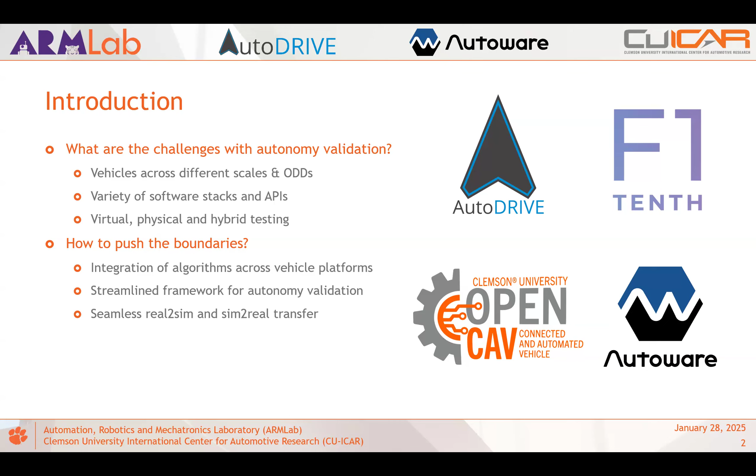There are a variety of software stacks and APIs out there, and we can have an option of testing purely virtually, purely physically, or in a hybrid setting. These kinds of challenges were the main address point of the paper, and how we can push the boundaries to now use AutoDrive with the AutoWare stack was the main focus.

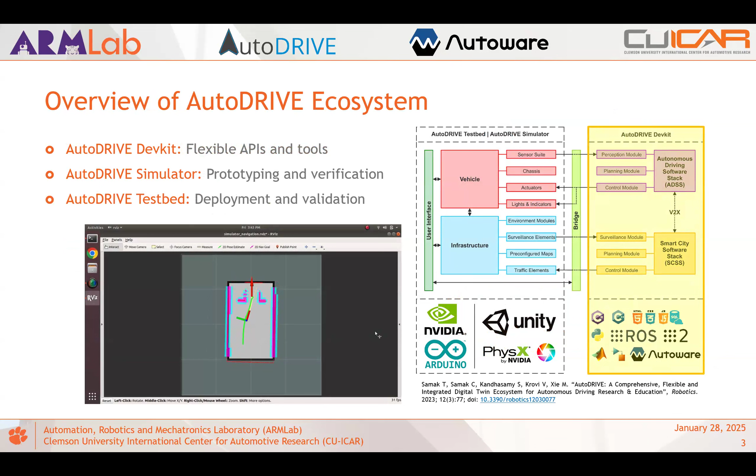For those who might not be aware of AutoDrive, it is an ecosystem we are developing, wherein we have three distinct components. First is the dev kit, which has a flexible set of APIs and tools for developing autonomous driving algorithms, and this is where we are now interfacing it with the AutoWare stack.

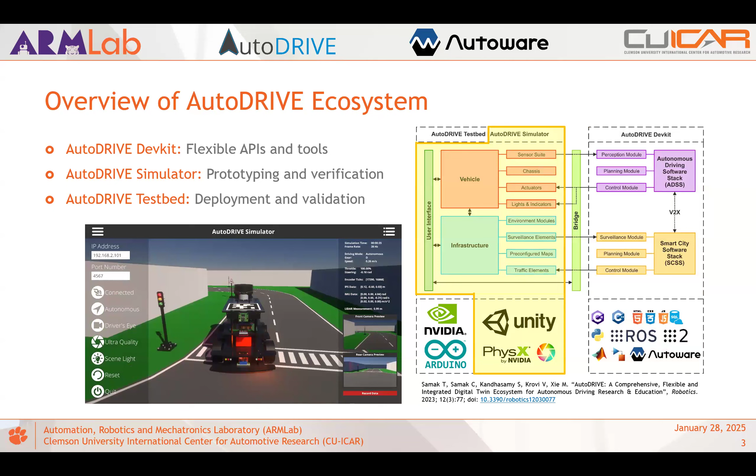Next is the simulator, wherein we can do virtual prototyping and verification across parameter sweeps and potentially even in the cloud, as we'll see. And finally the test bed, where we can do the physical deployments.

Now these are all examples with a single vehicle to show the examples, but as we will see, we were successful in deploying this across different scales and ODDs.

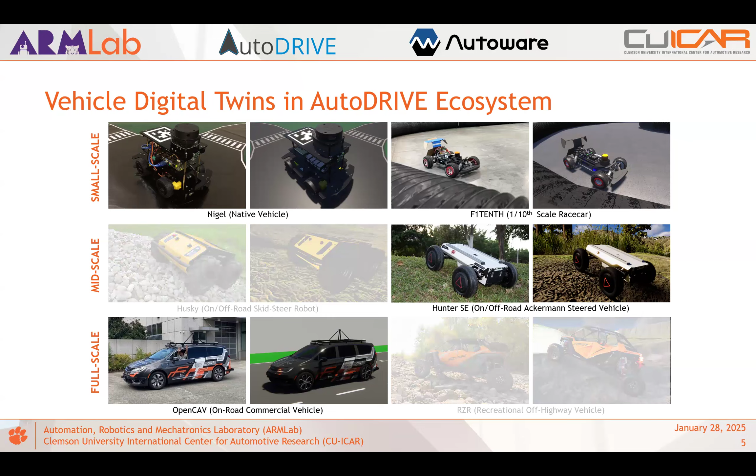So these are some of the vehicles that we have. The rows indicate different scales, and in terms of the columns, the first and third columns are the real or physical twins, and the second and fourth columns represent the digital twins of the same vehicle. These are the four vehicles we will be particularly considering in the further slides.

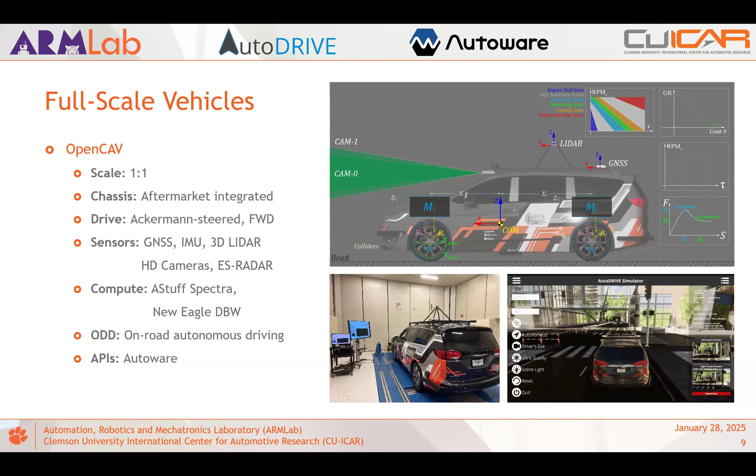This is one of the vehicles called Nigel, which we started off the AutoDrive ecosystem with. We were able to successfully expand it to other vehicles like the F1TENTH, as most of you would be familiar with. In the mid scale we have the Hunter SE, an Ackermann steered platform by AgileX. Finally, in the full scale, we tested and deployed things with the OpenCAV, an aftermarket integrated autonomous vehicle that we have at our facility.

So across all of these vehicles, the common deployment was using the AutoDrive simulator or the testbed, or whatever component of that, along with the AutoWare stack.

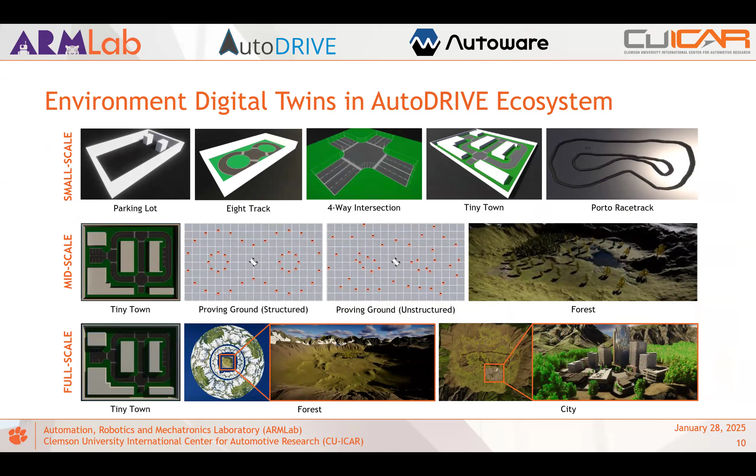We tested across different environments. I will not belabor the discussion here, but each of these environments targeted either a distinct ODD or different features in terms of the environment representation. And as we will see in the deployments phase...

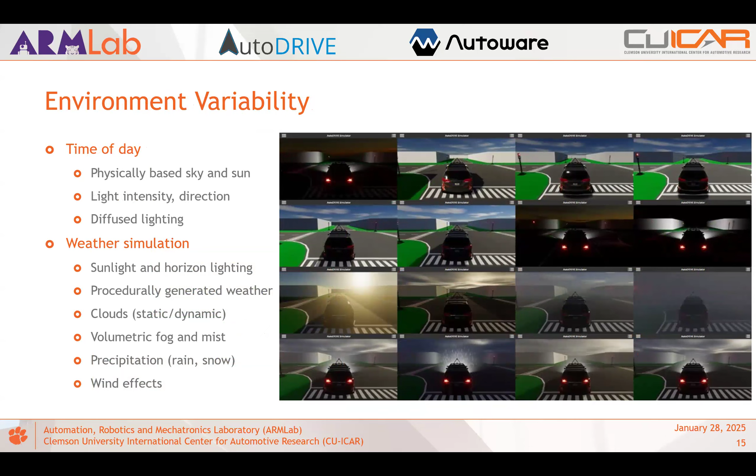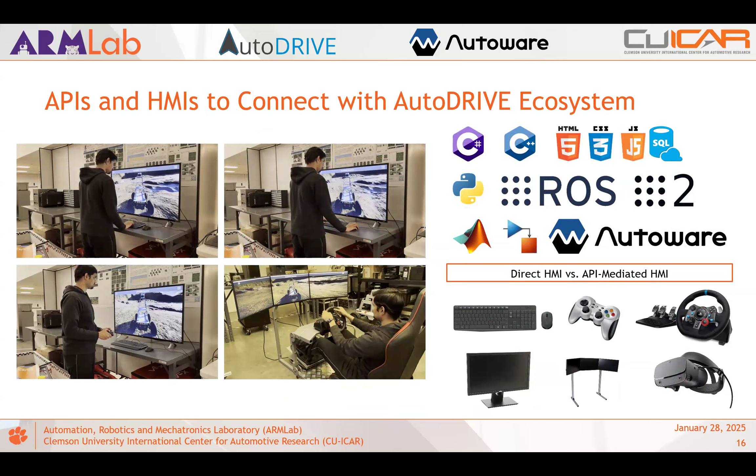We were able to even control the environment variability, in terms of the times of day or the weather conditions we are working with. While we have a whole host of APIs and HMIs that we can work with, the primary target for this work was Autoware. In one of the future slides, we will also see the different HMIs potentially in action.

This is the deployment with Nigel, where the core focus was to demonstrate an autonomous parking application with sim-to-real transfer. In terms of the sim-to-real transfer, it's worth mentioning that we did not change any perception parameters or controller gains, and we were able to do a zero-shot transfer from simulation to reality using this framework.

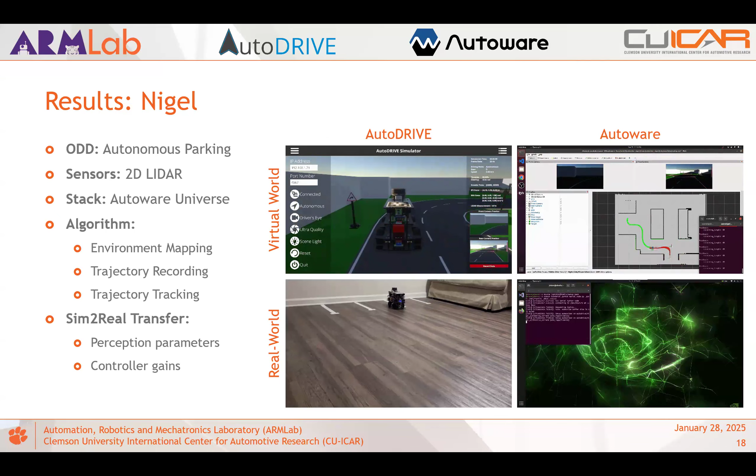The same applies to F1TENTH. The only difference here is the operational design domain, wherein we are now targeting a little bit more towards the racing application instead of just parking. And again, we were able to do sim-to-real transfer without changing any perception parameters or the controller gains in this case as well.

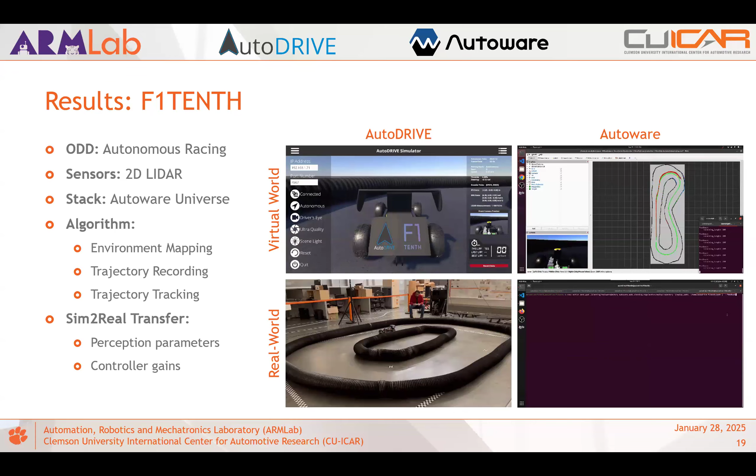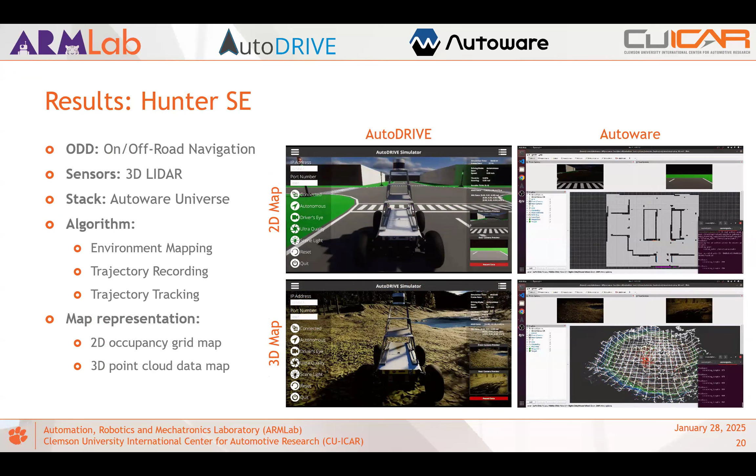Coming to the mid scale, here we experimented with on-road as well as off-road navigation. The top row indicates, again, a similar parking application wherein we have a simplistic environment representation. And in the bottom, we can see a deployment in the off-road area wherein we are using a point cloud map now for localization and point-to-point navigation from a designated source location to the designated destination.

And finally, we also did a similar case study with the full-scale vehicles. This was targeted towards the on-road domain. Again, the application remains autonomous parking, but here we experimented with 2D and 3D representations to see how it affects the environment representation. In the first row, you can see a simplistic environment representation wherein 2D maps or surrogate maps could be sufficient for navigation. But in case of higher fidelity environment representations, which is what we would most likely encounter in real world scenarios, 3D point cloud becomes a necessity or a benefit.

So these were some of the highlights from this presentation.

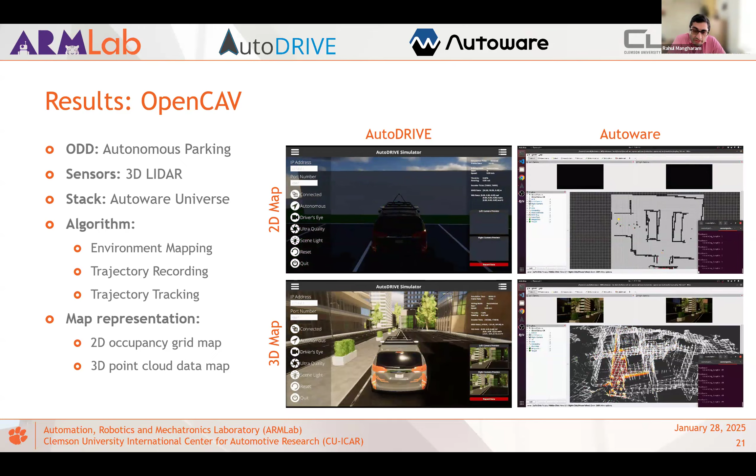Tanmay, on the right hand side, are you showing the real thing, or is it still in simulation, the point cloud? Could you repeat that? You mean like at the right bottom, you're showing the map, right? Yes, that's just in sim, no? So it's the map of the scene that you see on the left in the simulation. Oh, in the simulation, okay. Yeah.

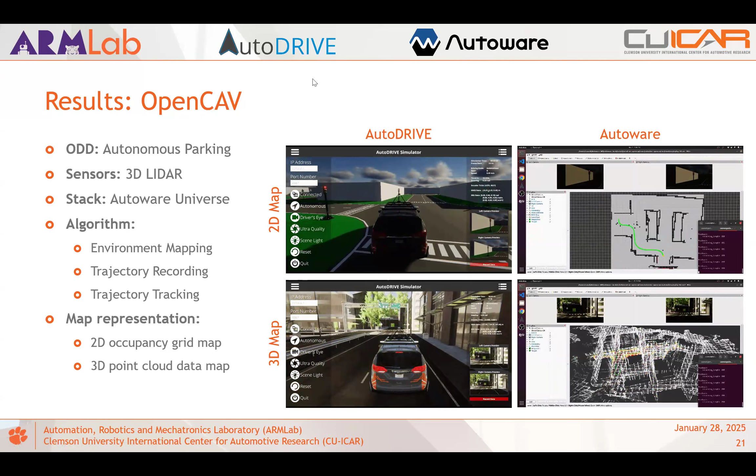And then apart from this, if we have a couple of minutes, I'll just ask Tanmay to give a glimpse of the sim racing league that we were able to deploy at IROS and CDC in the past few months.

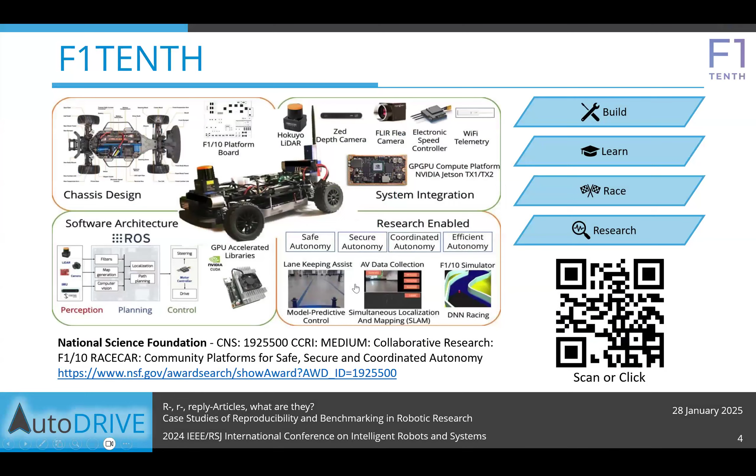We can't hear you. Chinmay, Tanmay, are you all speaking? Because we cannot hear you all. Yes, Dr. Mangharam, we were speaking. I think Tanmay's mic might not be working. I can just ask him to use this. Okay.

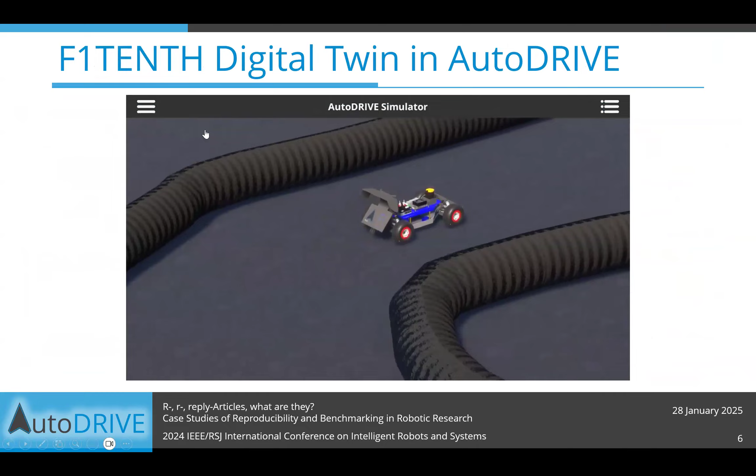Let me just back up a few slides. Sorry about that. So yeah, the idea was to use the F1TENTH digital twin that you saw in earlier slides.

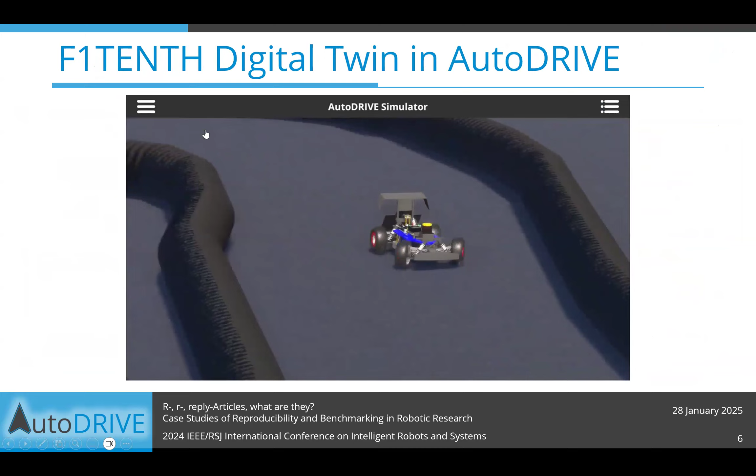To have a simulation-based competition for the F1TENTH, where teams from all across the globe could now have the F1TENTH competition accessible. And more importantly, this could be a good way of tying in reproducibility and benchmarking within the competition setting. And then, of course, these can also be expanded further for full scale or off-road applications.

We also have plans to now put this in the cloud, hopefully for the ICRA competition this year itself. But if not, at least by the end of this year, we definitely wish to have a cloud setting where instead of just local resources, we can also have a common cloud platform, and the AWS credits can hopefully go there and put to some good use. So that's definitely in the plans.

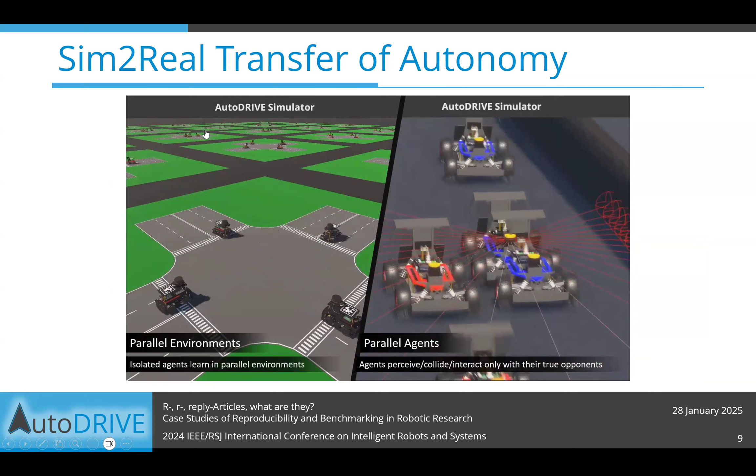And then, of course, the idea is always to be able to transfer policies trained in simulation to reality. We had a team at IROS where they could successfully do this, and they participated both in the sim racing league as well as in the physical racing league, and had a zero-shot sim-to-real transfer.

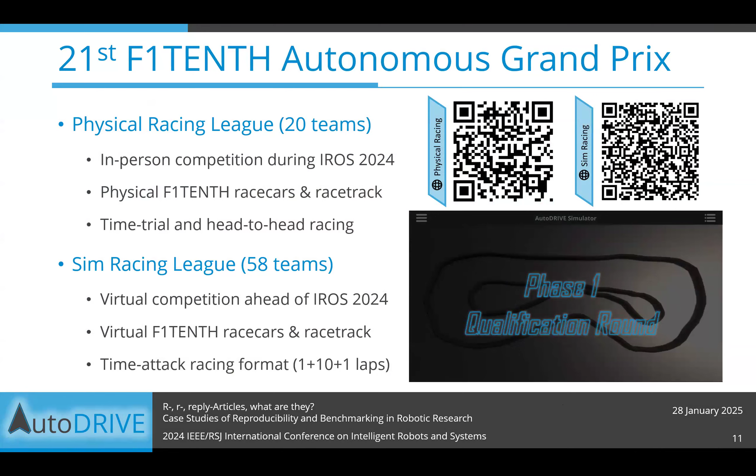So here is just a quick overview of the competition. I won't go into the details, and the video that you see here also talks a little bit about the competition summary. I think Chinmay has just posted a link to that in the chat, so I won't belabor that.

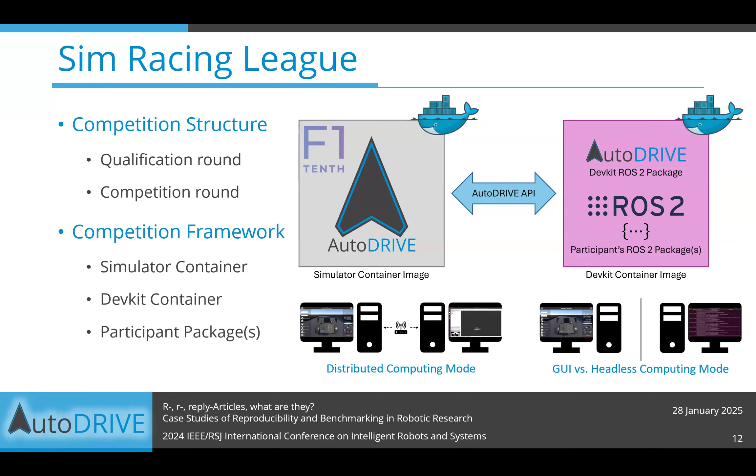And this now enables reproducibility and benchmarking, as I said, bringing AutoDRIVE and F1TENTH together to now unlock the full potential of autonomy in terms of both physical and simulation-based competitions and research.

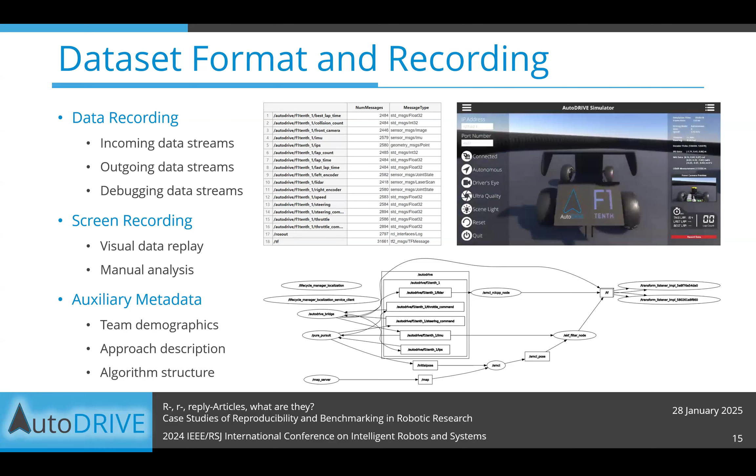And then these were some of the metrics that we used to mark or benchmark the performance of different teams and have a detailed analysis of and impose race standards across different teams that we have.

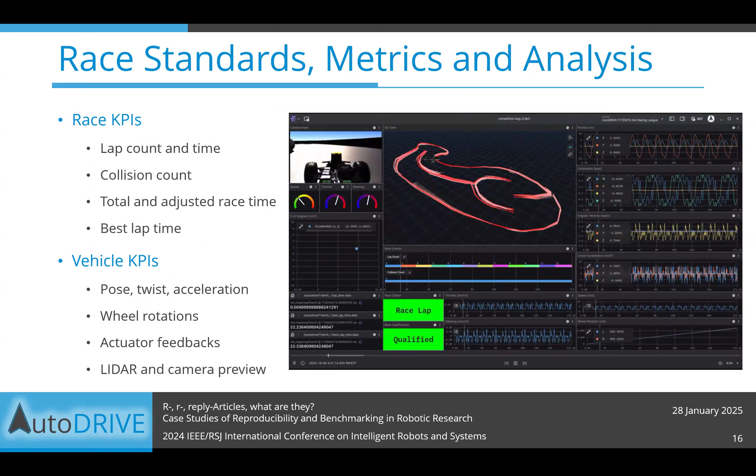And the idea was to now also expand this, and especially when I talk about CDC, we also had a few teams that are now requesting or already on their way to deploy things with Autoware.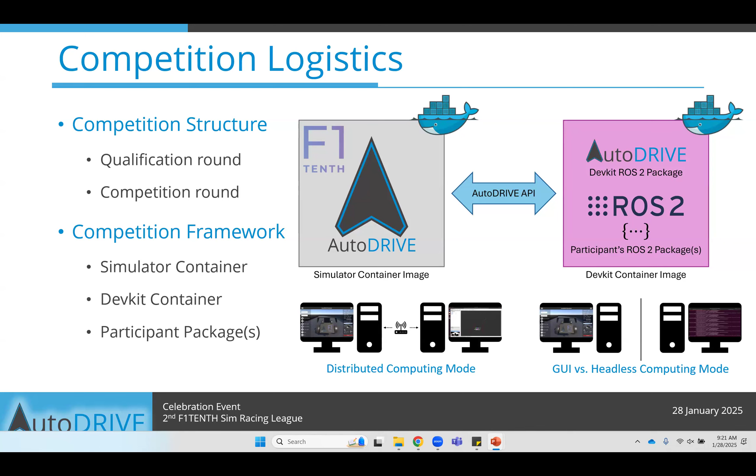But another important thing here is that we have now ported the framework to support ROS Humble, and we are hoping to shift the entire Autoware Autodrive integration framework towards Humble and the latest release of Autoware, so that users can leverage the latest and greatest features of Autoware with Autodrive.

So I think we went a little bit over time, I'm sorry about that. But if there are any questions, we can hope to answer them, or if there is no time, we can move on to the next presenters.

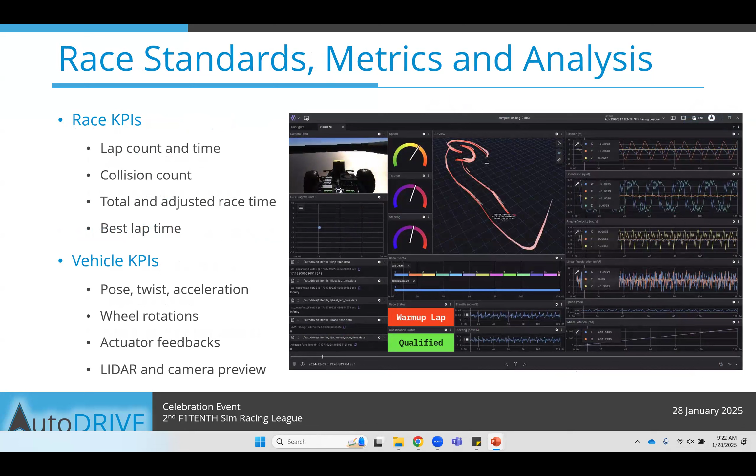Thank you so much, Tanmay. This was a very good update, and I think our follow-on with Pooja and Mike is to figure out now how to integrate this within the Autoware universe and make it one of the publicly available digital twin sim-to-real environments that folks can use. I think hosting it on AWS is definitely the right direction for the next competitions.

Yeah, thank you. Any other questions folks have? Yeah, hey Raul, just a quick question. Great work, guys, really nice. So in terms of using it from an Autoware perspective, and I know you guys also have a Pixkit, but I'd be interested, and Alex is on the call too for Carballo, who also has a Pixkit, some physical hardware.

Do you have any thoughts on this? I mean, I'm interested in exploring the validation, verification, putting it on an actual vehicle here that we have available, and I know you guys have one too. Are there any thoughts on that? Like, what would it take to do something like this on the Pixkit, as an example?

Yes, so in the presentation you might have seen our deployments currently at small scale, including Nigel as well as the F1TENTH vehicles that we have. But we are currently working with the Pixkit. We are also in the process of system identification and bringing the Pixkit into the Autodrive Simulator so that we can work with its digital twin and then do zero-shot transfer, hopefully even at that scale. And as further scaling, we are also currently working with OpenCAV to do the same.

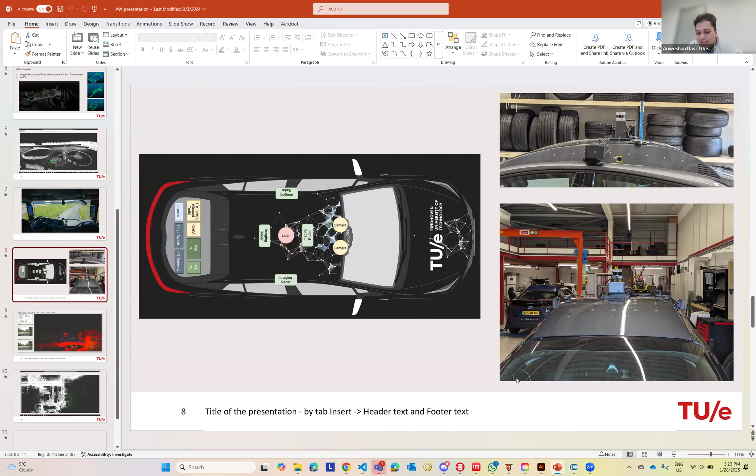That's the main update. If you want to see some results, let's say the point cloud that we generated from the map, generated from only the radars, is this.

And what kind of radars are you using? So these are Continental 5th generation. To be exact, it's 548 RDI. So this is a high definition radar. It has 12 transmitting antennas and 16 receiving antennas.

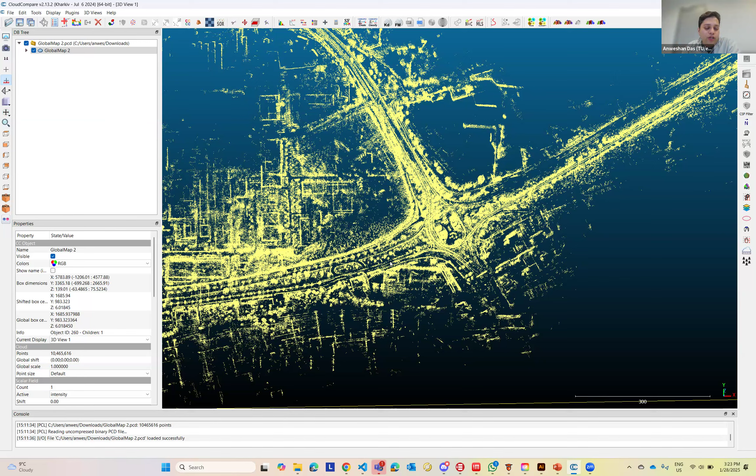But these are not the greatest high resolution, high definition radars, which might have 48 transmitters and 48 receivers. For each scan, it can generate up to 800 points, each one of the radars.

And what's the benefit of having a radar-based system versus a LiDAR-based system? The main advantage is that we want to show it works in really difficult weather scenarios, let's say fog or snow, where radar signals are immune to those. We have really seen, when we were recording data in foggy areas, since we were only using LiDAR-based or point cloud-based localization, it really struggles.

We want to say this is a much more redundant system, which is adaptable to other weather conditions, adverse weather conditions. And what kind of localization algorithm are you using?

For our RioSAM, we use GICP, fast GICP to be exact. But we have also tested this combined radar point cloud on a LiDAR-based point cloud map, where we tested with NDT, and there also it works.

Okay, very interesting. Yeah, we are also really happy to see that it works on the maps generated from LiDAR point clouds. It was also quite exciting for us. And we also want to publish those results in IROS.

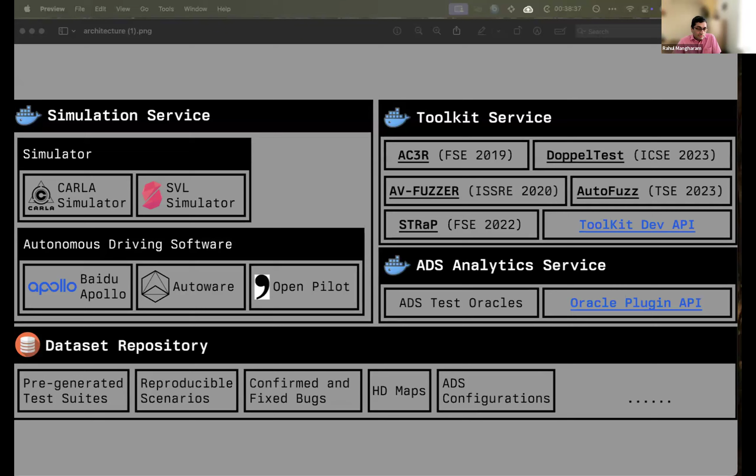Just one quick one, Josh. If the application that you're scanning and monitoring - if one wanted to go beyond Autoware and add, say, a speech recognition module for interaction with the robot, expanding the scope of the Autoware ecosystem - could that also be tracked with your monitoring, getting input on errors and so on from that side of the equation? Would that be easy to add as an additional app?

That's one of the goals we want to support. So for instance, if you want to add something like that, we want to provide essentially the test harness, the CI/CD infrastructure, so you can regression test that more easily, and maybe even fix some of the bugs automatically.

Yeah, okay. And then that's awesome.

Have you looked at whether this dovetails with certain requirements in ISO 26262 or other documentation, like hard-coded certification quality parts? Whether this facilitates that? So, ISO 26262, road vehicle functional safety, that kind of stuff, in general, because there's so many moving parts to that, depending on where you are, et cetera. But with regards to actual certifications, regional certifications, regulations, part of it does go into ISO in general, how well your process is documented, process ownership, changes, all that sort of stuff. And it occurs to me that this facilitates that somehow.

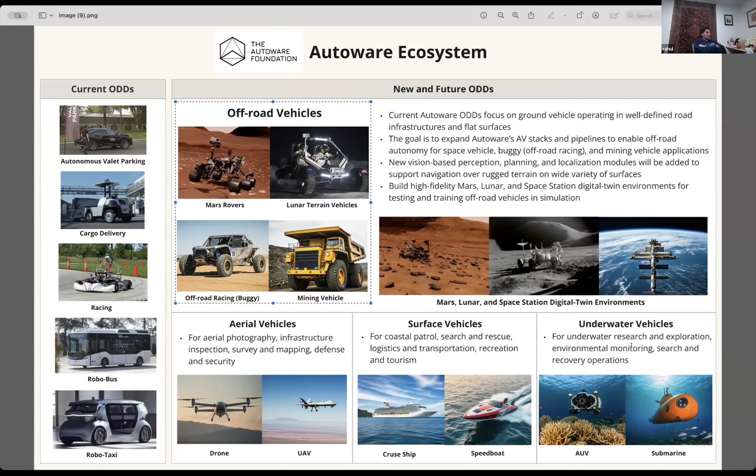Think about this in a theoretical context, which is where academics should have more value: how do you build a simulation environment where you segregate the physics of the environment, whether ground, water, or space, and the design for experiment, and these things that are the cornerstones of a virtual environment. How do you segregate them from an abstract point of view so you can get some level of plug and play?

That's the key thinking process, because once you can do that, you can say, okay, we can integrate AirSim over here while still using the random number generator for scenarios. There's a lot of intermediate mathematics that, if thought through well, can be quite interesting.

Yeah, thank you so much.

Hormoz, to complement what you were talking about regarding directions in dynamics and controls, I think this will encourage a lot of learning-based pipelines. Several of us are interested in this learning-based control for more challenging environments. Going back to what Rahul Razdan mentioned, we really want to understand from a more general mathematical perspective so we can change the setting, change the interactions.

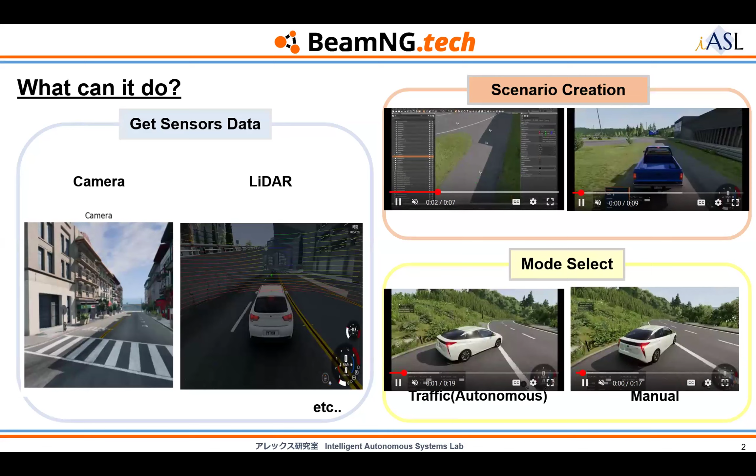The great thing of using BeamNG, at least for us, is that it includes maps in many places, including Japan. It has been quite a limitation with traditional simulators like Carla. So now we have an environment that has maps and assets of everywhere.

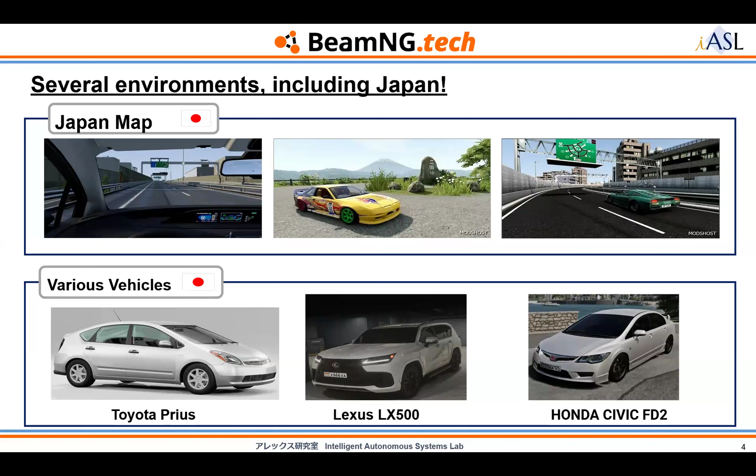Initially, for example, with SBL, when we were working on racing etc. several years ago, all the effort went to create the Indianapolis racing track. BeamNG has the same track for years already, and they have several racing tracks. And it's not only about racing, they have insane emphasis on realism, and that's great.

The amount of assets, and the possibility to have vehicles that crash, and take that into account so that we can evaluate the issues. For example, in this case, the issue - we also integrated the simulator with a steering wheel before, so that we can have actual feedback.

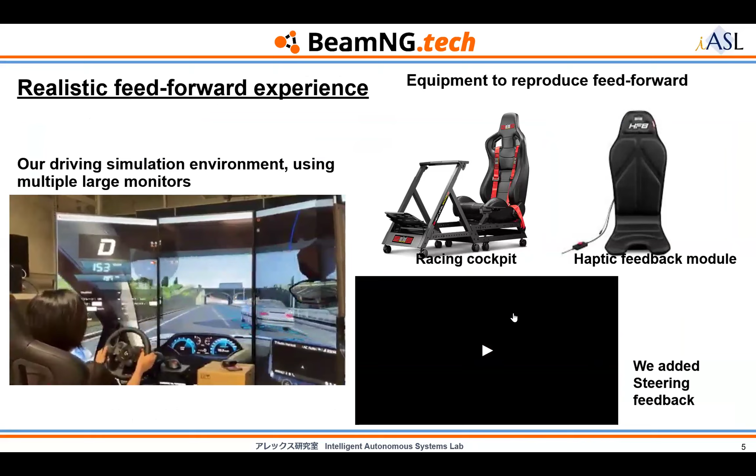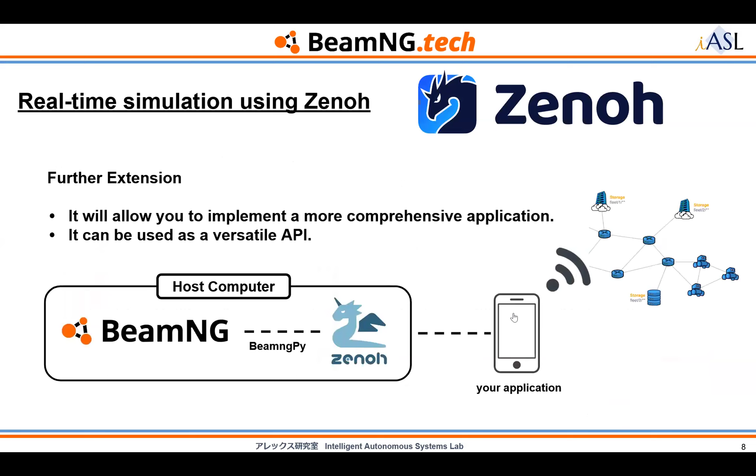We did a Zenoh integration because the ROS2 driver that BeamNG provided was very slow, so we integrated with Zenoh. Now we have real-time performance, and basically no lag, no delays.

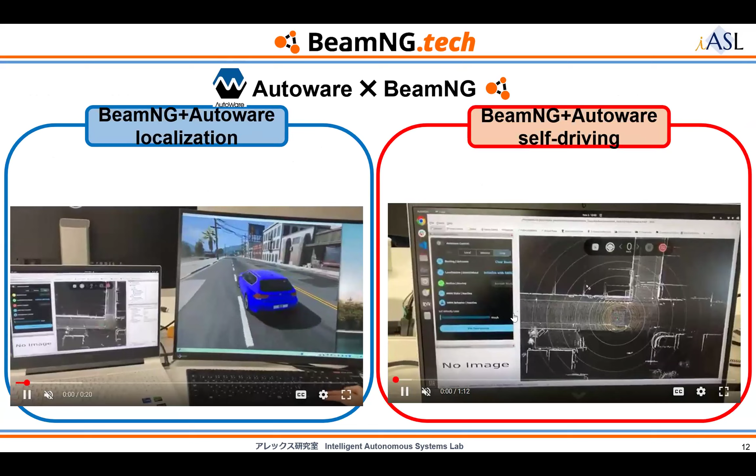The software is being contributed. We did some maps to evaluate, did the mapping, tuning, and so on. And finally we have BeamNG working with Autoware Universe, the latest version, and we can now start doing interesting simulations, like what happens if Autoware is driving on a snowy road.

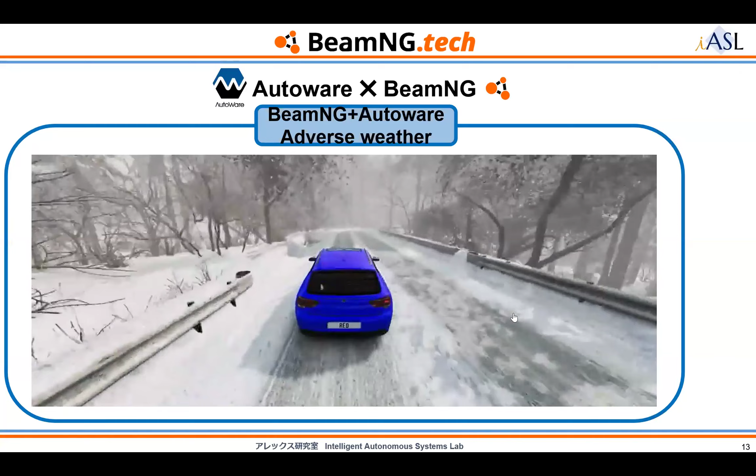We did nothing, no calibration or anything with Autoware. Of course Autoware is not prepared for this, but now we have a tool that has high realism, and we can do many interesting simulations, and it's available.

We're happy to provide the code. It's one of the projects that we registered in the COE project. So that's my update, thank you so much.

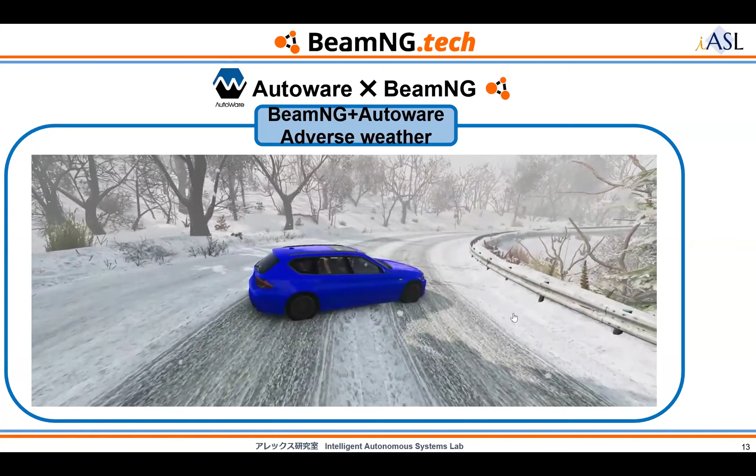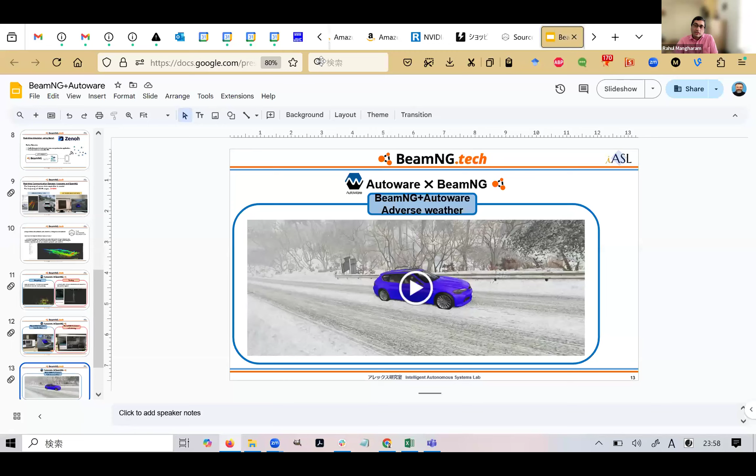Well, thanks a lot Alex. This is very cool, and I think it relates to our previous discussion on even going off-road into other environments. So I think this could be something we take forward together, and I'll follow up with you. Sure, yeah, and anyone who's interested, I think we can work together to build up on this environment. Yeah, I think Abhijit, Ziran, any quick words?

Sorry, we are a little bit out of time, but Rahul, I can do a last minute update, just one minute. So again, I'm assistant professor at Purdue University.

We have been using Autoware for a lot of research regarding using large language models for autonomous driving. We previously implemented LLMs based on ChatGPT to enable decision making for autonomous driving. And now we're working on deploying an onboard vision language model using Qwen, Alibaba's version, the Chinese version of LLMs, to enable the control perspective driven by large language models or vision language models. We are also exploring the possibility of using DeepSeek, which is all over the news, to enable that and integrate it with Autoware. That's the next project on our pipeline. But yeah, we have been using Autoware a lot for large language model driven autonomous driving. That's all.

Cool, very cool. Thank you, Ziran.